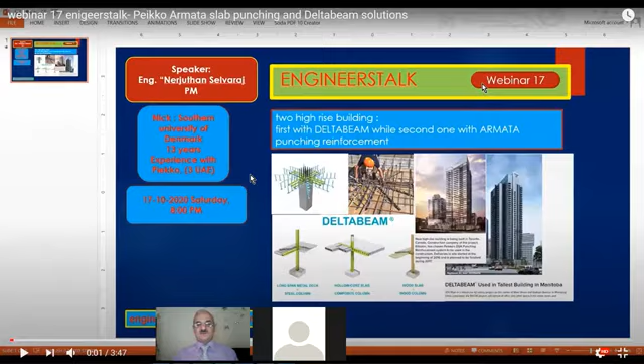Thank you, engineer, for the nice introduction, and welcome from my end for today's webinar on tall building solutions. As mentioned, my name is Nerjuthan, but shortly called Nick as well, so you are most welcome to call me Nick. I have been working at Peikko for almost 13 years, and the last 3 years has been in UAE with various projects from KSA to UAE itself and Oman and India as well.

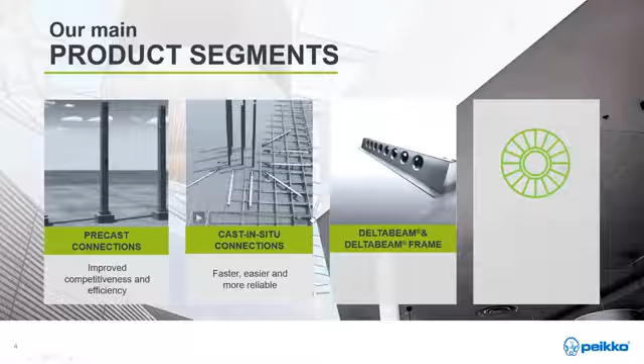Basically, we have four main business categories related to product segments: precast connection, which I will go through today with a few project cases; cast in situ applications, where the product we will go through is Armata, basically a punching reinforcement to prevent punching failure; then Deltabeam frame, which enhances the slim floor structure; and also wind applications for onshore foundations, which we will not go through today.

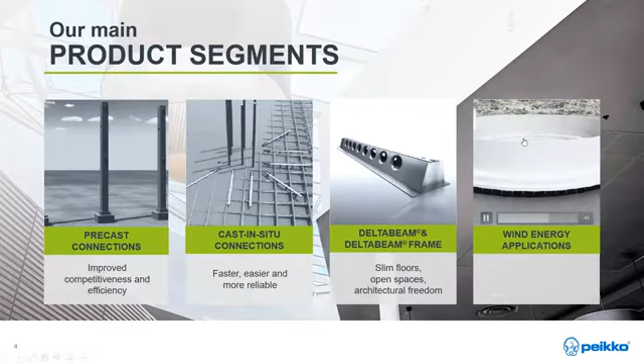But across all four business segments, we are doing our utmost to be the forerunner. This means we are doing a lot of testing, not only in-house, but in cooperation with multiple universities around the globe. Since we are a European company, most of the collaboration is done with universities located on the European continent.

So let's go to the definition of the tall building. You can call it a high-rise building, tall building, or multi-story building, but basically they cover the same name. The Council on Tall Buildings and Urban Habitat mentioned that tall is related to context, proportion, and tall buildings embracing technology as the criteria, which can determine whether a building can be classified as a tall building.

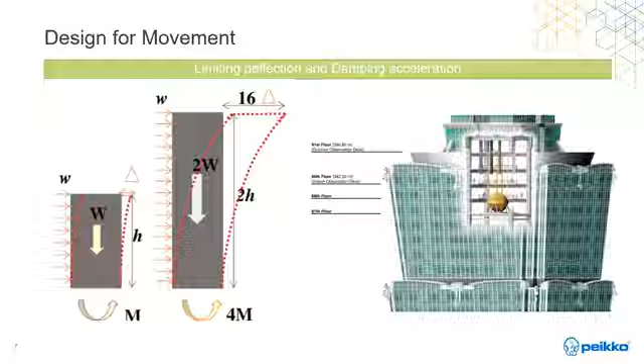If we move to the main design aspects, once the building grows taller, the vertical load increases with the height, and at the same time the horizontal loads increase significantly. This affects the tall building much more. Therefore, a tall building must have adequate bending and shear resistance and shall not lose its vertical load bearing capacity. Worldwide, tall building design practices differ and might be covered by a combination of gravitational, wind and seismic loads, depending on the local building code. The main design objective is to ensure adequate lateral stiffness of the building.

In principle, the structural engineer needs to satisfy two criteria.

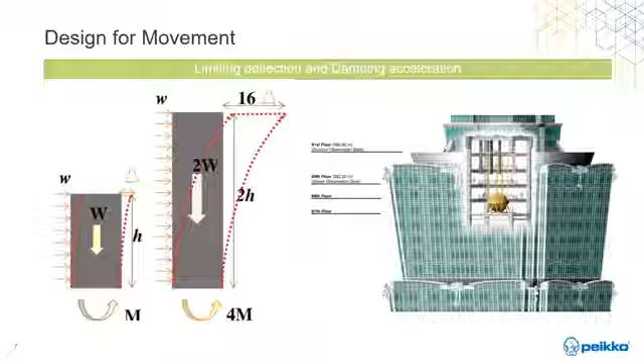They have to satisfy two serviceability criteria. One is lateral deformation, and the second is motion perception. Satisfying the first means limiting the maximum lateral displacement, as you can see in this picture, at the top of the building, and inter-story drifts separately.

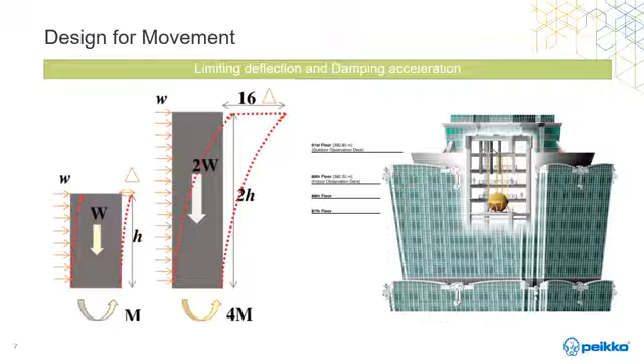The main purpose here is controlling the deflection so the non-structural elements function properly. The practical way to limit the drift is to increase the bending stiffness of the horizontal member, or add a shear wall, or even design stiffer connections.

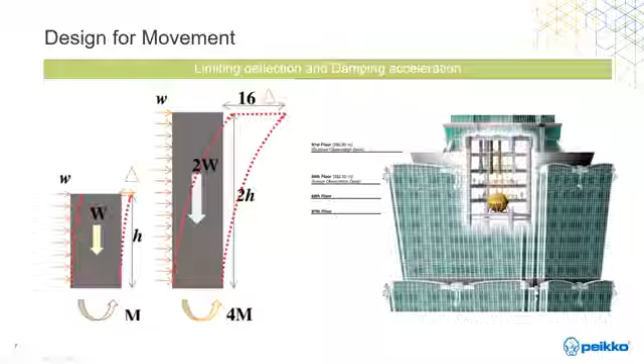The second criteria is to ensure occupants' comfort level, which is dictated by the amount of wind-induced movement. A tall building can be allowed to sway considerably, but the acceleration rate at which movement increases must be damped within acceptable limits. Those limits are based on the sensitivity of our inner ear to motion.

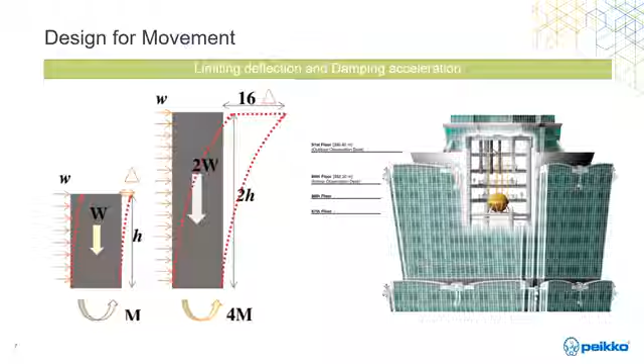Acceleration can be damped in different ways, either by a stiffer structure or sometimes by supplementary mass damping, such as a tuned mass damper. It simply limits the horizontal acceleration with a mechanical shifting large mass in the opposite direction of the applied lateral force.

Here in the slide, on the right side, you can see the largest and heaviest mass tuned damper in the world, in the famous Taipei 101 in Taiwan. It was once the tallest building before Burj Khalifa took over.

If we go to the classification of the typical structural systems used in tall buildings, as discussed before, besides transferring the gravity loads, the important role of the structural system is to resist the lateral forces. Therefore, the hierarchy of the system is mostly categorized with respect to its relative effectiveness in resisting lateral force. So what does that mean?

As you can see in the picture, what engineers have tried to develop is some kind of system based on exterior structures, where basically all your columns carry the lateral forces, or interior structures, where you have cores or shear walls to provide stability against lateral force.

This classification was done by Mr. Mir M. Ali and Kyoung Sun Moon, if I pronounce it correctly, categorizing or classifying systems based on these two criteria.

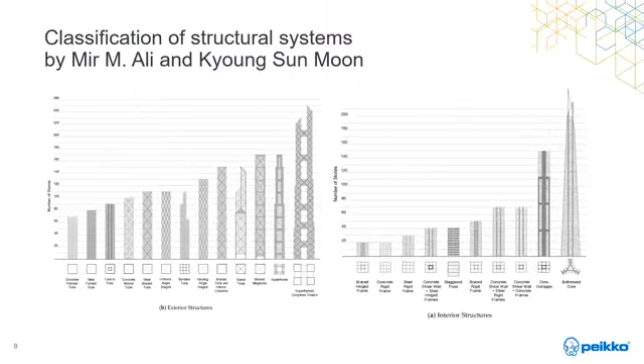To overcome the shortcomings of a single structural system, a natural idea is to integrate the strengths of different systems to obtain the desired behavior of the tall building.

With reference to the classification of structural systems on the previous slide, rigid frames are economical for buildings up to 25 to 30 floors, above which their drift resistance becomes costly to control. However, a rigid frame combined with shear walls results in a much stiffer structure, and you can actually go up to 60 to 70 floors.

To reach super tall buildings or towers, the mentioned system is not sufficient. You need a much more complex system to obtain stability. A super tall building is classified when you have a height of 300 plus, and for those tall buildings, you need mega tubes or super frames with outrigger systems.

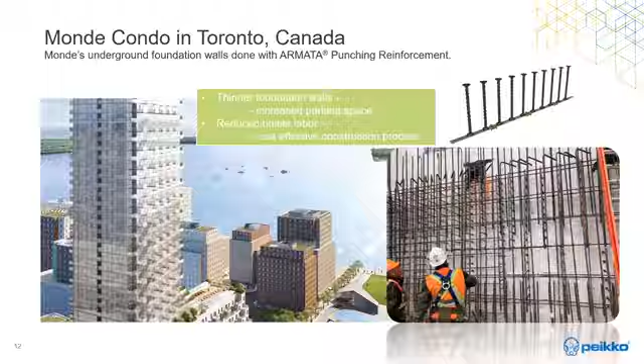Let's go to the top of the building. Here I will explain to you about the floor-to-floor height solution, basically slim floor.

We have multiple applications to achieve this target. But some of the added value of having the slim floor is that, first of all, you can add extra floors, or you can reduce the overall height. And for the developer, the end user, or the client, it simply means better return on investment. This was a key factor for some of the projects I will showcase.

It's not a secret that developers want to maximize the number of floors in order to get more rentable space within a certain height allowance. The slim floor structure helps very well here. By reducing the floor plate thickness, floor-to-floor height becomes lower, which in turn yields more floors for a given building height.

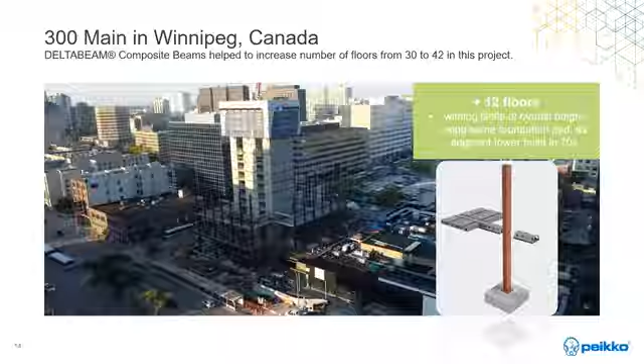Delta beam instead saved the overall height of the building for additional floors, and maximized the total square footage. Talking about the savings in the same project, I will go to the foundation size, because there are a few examples of how this has been achieved.

The powerful argument in favor of slim floors is that you are reducing the weight of the overall structure, which in turn makes the foundation less expensive.

In this case, the 300 Main new tower is designed with the same foundation pad as a similar building called 360 Main, which is close by, built in 1979. Since the combination of delta beam, hollow core, and steel column is much lighter than the previous 360 Main cast-in-situ concrete structure, the developer was able to increase the number of floors from 30 to 42, using the same foundation pad as the cast-in-situ structure.

So this is another strong argument for why slim floor structures are generally very recommendable. An added advantage of delta beam, a composite beam, is the 2-hour fire rating without any additional fireproofing, which is also proven to be substantial savings compared to conventional wide flange steel.

The next project is also located in Winnipeg, Canada. Like the previous project, it also uses delta beam composite beams, and it played a very important role in meeting the needs of the architect and the structural designer.

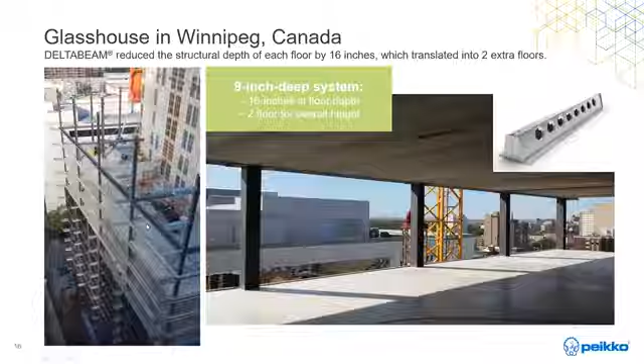By using the delta beam system, they reduced the floor height by 16 inches, and this translates into 2 extra floors compared to the conventional structural system technology.

Besides adding extra floors, since everything is prefab, it also allows for rapid speed of erection, since everything is prefabricated. Delta beam composite beams were then connected with the column using the Peikko modular PC corbel.

I think you can barely see it here. It's actually a hidden corbel system, which is welded from the factory onto the steel columns. So it gives you this kind of quick, easy installation.

And flat ceilings, as you saw in the previous slide, also mean straightforward HVAC installation that further reduces building time. An additional bonus to the Glasshouse building site was that the delta beam composite beam did not require any intumescent coating.

Intumescent coating is a standard industry procedure if you have exposed steel, but this has to be done on site, and it takes time. You need a primer, a base coat, and a top coat. None of this was needed with delta beam, as the beam is cast in concrete.

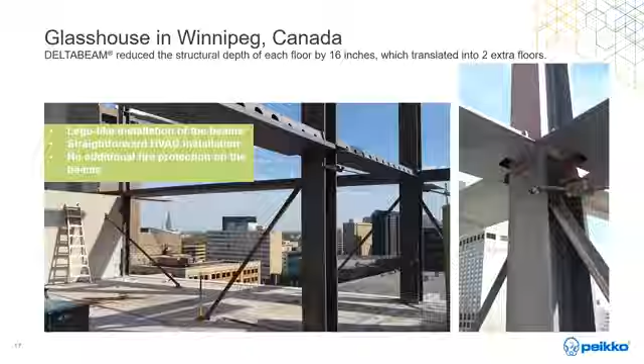To prove this point, delta beam has actually been UL tested and has achieved 2 hour, 3 hour, and 4 hour ratings without any additional fire protection on the exposed steel part of the delta beam.

The next project in the slim floor is not with the delta beam, it's with our PSP and Kubo. Now we've moved to the European continent, and we will not have Armata as mentioned earlier. We'll speak about PSP, basically the same product, but due to local requirements, we are calling it PSP.

Reinforced concrete slabs have been used in this project, supported by high-strength precast concrete columns and shear wall cores. Generally, in situ flat slabs are characterized by the absence of beams. Whatever loads are added onto the slab are transferred directly to the column, so the columns need to punch upward through the slab.

So to avoid drop panels over the column position in the slab and to accommodate the high shear stresses, Peikko PSP punching reinforcement in combination with Kubo column caps was applied for this project, and you will see that in the next slide as well. Kubo is basically additional reinforcement to take high shear force along with our PSP.

This is the Kubo, the steel part, which is placed on top of the column. The thickness of the slab was kept at a very relatively low level with the help of our product. Part of the concrete and column were produced in a precast element factory and delivered with our Kubo, as you can see on the right side of the picture.

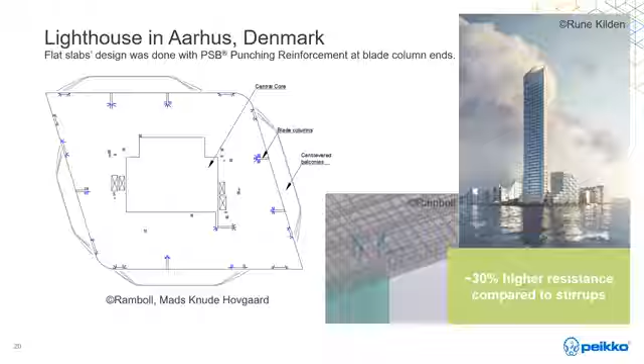The next project is a post-tension flat slab, used in every floor of the Lighthouse Tower project in Aarhus, Denmark. Post-tensioning in this project actually helped to achieve a 200 millimeter slab thickness, with up to 8.2 meters span without any column.

The slabs are supported by a central core and blade columns on the perimeter of the building, as you can see in the typical layout. In addition to the outrigger action, where the slab is rotationally fixed to the column and the core, this was employed to increase the stiffness of the building against wind loads and vibration.

These requirements made the column-slab connection design very critical, and the high load on the connection required the use of punching reinforcement for all floors. Again, Peikko was chosen as a supplier and design partner, simply due to the Peikko PSP punching reinforcement having a higher upper limit for punching capacity.

This is what I tried to show in the slide here. We are able to achieve 30% higher resistance compared to traditional shear links, simply due to the headed stud formation of our product, which gives a much higher anchoring effect in the concrete.

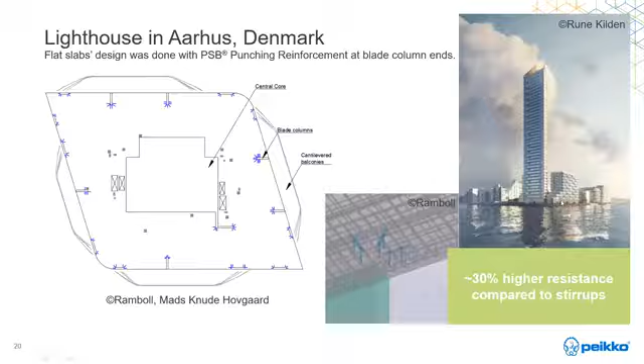The project is ongoing and planned to be completed in 2022, and it will be one of the highest buildings in Denmark.

The last project I will take you through is the Alsik Hotel, also located in Denmark, in the southern part, in a city called Sønderborg. It's designed by the world-renowned architect Henning Larsen, who also designed the Ministry of Foreign Affairs in Riyadh. This is the picture you can see, just a bonus information for you guys.

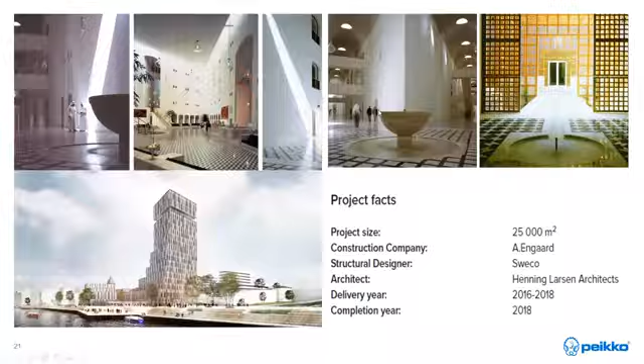The structural concept is very much in line with what we spoke about already. You have a central core in the middle, which is cast in situ, and then in the perimeter, precast columns with the delta beam in green, and internal beams, as you can see here, the small beams in the corridor area.

So the MEP can be done without any drop beams, supported by precast walls, shear walls here. This is how the structural system has been done. In the next slide, you will see the detail.

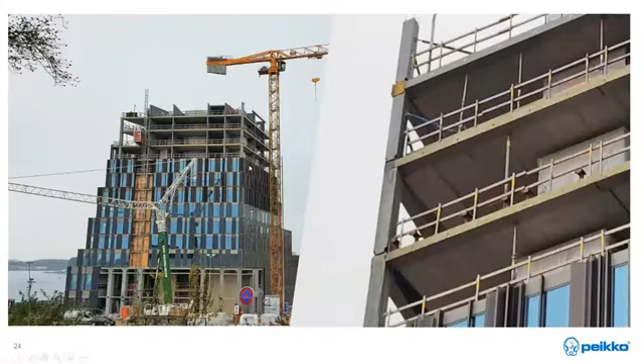The delta beam runs through the columns, and we've also utilized the Peikko column shoe in this connection, which I will come to later in my presentation. One of the main challenges was to control the deflection in the delta beam.

They had glass facades, directly fixed to the delta beam. Due to the sensitivity of deflection on the facade, the supplier had a very high demand on the deflection criteria. So all the beams on the periphery here are designed for L/2000 for the incremental deflection, applied by the movable dead load and live load.

So we can design the beam for a very tough deflection requirement as well, and still achieve a relatively slim floor structure.

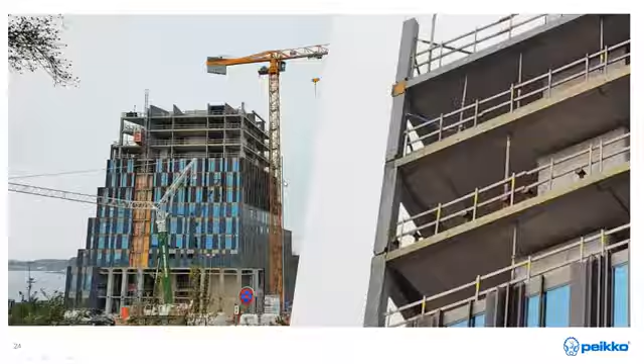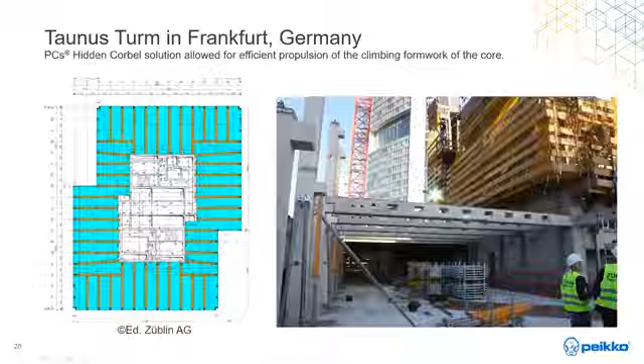In the next slide, you will see the cast in situ reinforced concrete shear wall, and the cores are widely spread in the tall building, as mentioned. This is simply due to the in situ concrete technology being favored by many engineers, because of the structural continuity it provides of the element.

But on the other hand, what we are seeing is a clear increase in use of precast concrete technology in tall buildings. What makes precast a worthy choice is that the main advantage is the high speed of construction, reduced shoring requirement, and easy quality assurance process to be implemented at the site.

The major challenge in this project was limited space available on the building site. The storage capacity in the upper floors of the tall building was very limited. So prefab cast concrete columns, beams, and slabs were selected for the project simply to eliminate the need of space-consuming formwork.

To simplify the construction, you can see in the picture our PCs corbel has been embedded into the shear wall before the reinforcement cage has been applied.

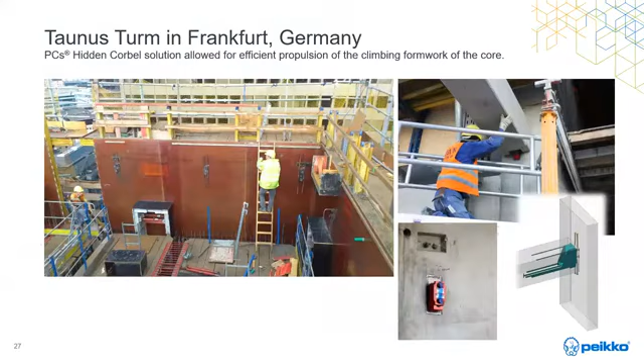At that level, the building forms a spiral by shifting the stories along its vertical axis. Above the 22nd floor, the tower returns to optimize floor areas and complete its rotation, realigning with the structure underlying beneath these alternating cantilevers.

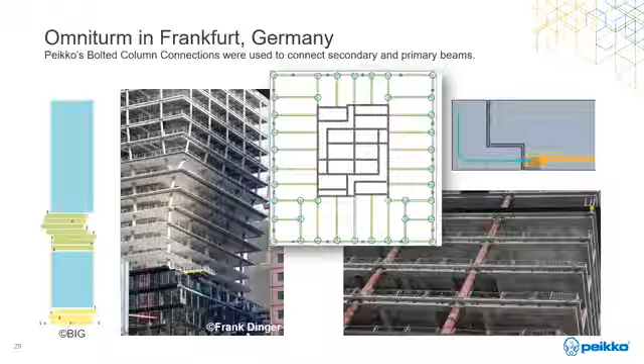Moving to design flexibility: in this section I'll showcase one project where Peikko typically engages as a design partner not from the concept stage, but coming in to provide the stiffness value to ensure global stability is secure. We are not doing the design for the full structure — that is the responsibility of the main lead consultant. But there have been cases where Peikko has taken the full scope of design, and in the next slides I'll go through one of those projects.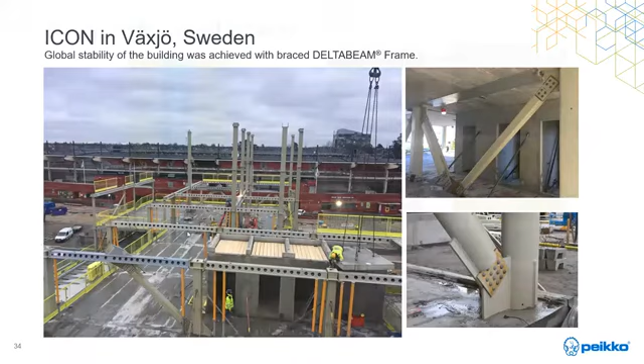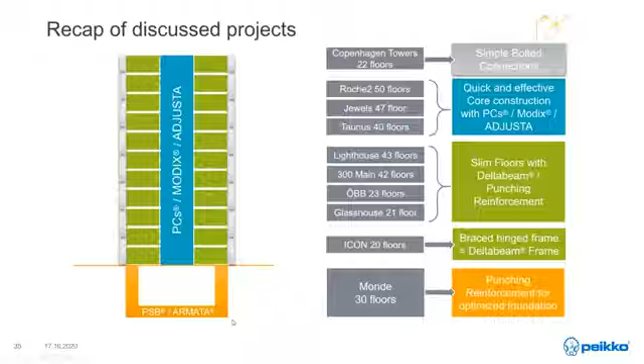I'm coming to the end of the presentation, so just a quick recap. I won't go through everything one by one, just to show that we're able to provide solutions from the base throughout every single floor up to the top of the building. The base we offer is what we call Armata or PSB, which can be used on foundation, wall, or slab. Then we have different applications to reach your target, whether you're looking for a slim floor structure with the delta beam or with our punching reinforcement.

And if you want to combine precast elements with cast-in-situ structure, as showcased in this very complex building, we have connection details to accommodate that as well.

Before we go to the question and answer time, I would like to showcase three different videos showing the projects in real action.

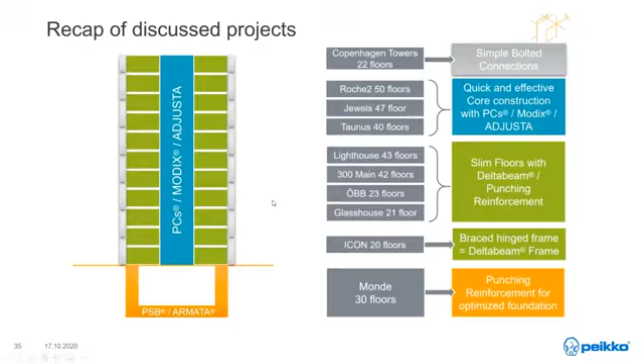The first project is also located in Copenhagen. It's a G+30, if I remember correctly, with a core in the middle, and the rest of the elements are precast. Here you will see the bolted connection in action.

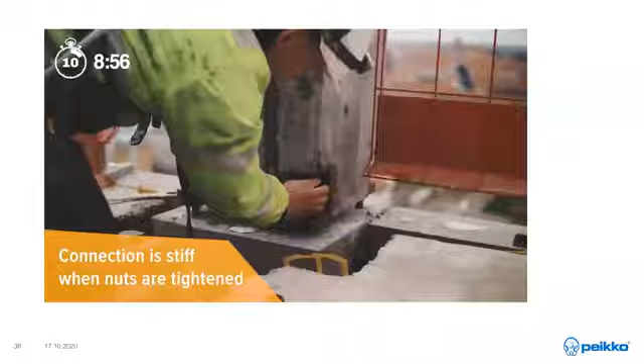Let's go to the next one. It's not a high rise, but it showcases the delta beam frame system and its ability to enhance construction time, and how it's done in a practical way. Since it's not a high rise building, we were able to do it with the pit connection system, which you will see in the video as well. This one consists of composite columns and delta beam composite beams along with hollow core precast slabs.

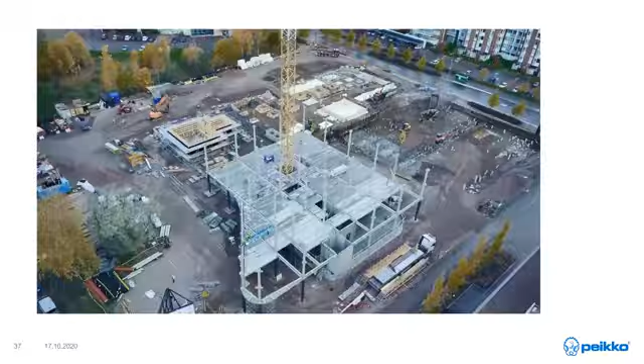Are you looking for a building frame that saves both time and effort? This is it, the Delta Beam frame. A complete one-supplier solution consisting of Delta Beam composite beams, composite columns, and other additional steel structures of the frame. Being a slim floor structure, it allows for a maximized room height and up to a 12 by 16 meter grid.

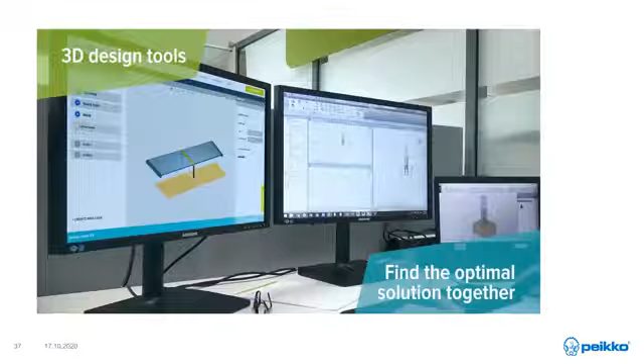Additionally, Delta Beam frame enables architecturally demanding facades and shapes and flexible open spaces. Our expertise in modern 3D design tools helps us find the optimal solution together with your architects and structural designers. The CE Mark frame components are manufactured in our state-of-the-art factories. Components are easy to transport, store, and install.

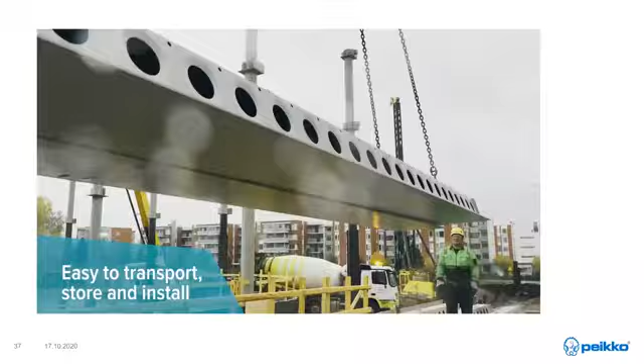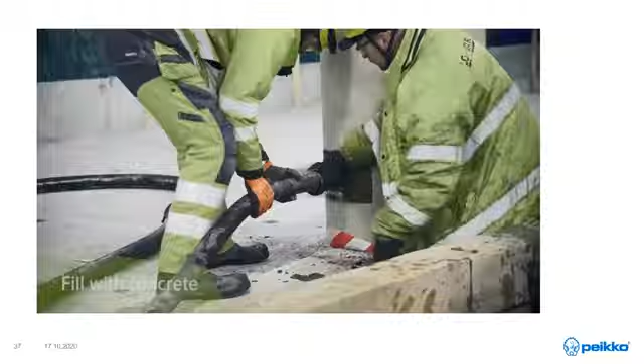First, erect composite columns with our bolted connections. Next, hoist and install the delta beams. Now you're ready to install the slabs, whatever your chosen system is. Fill the composite columns with concrete and cast the delta beams while you concrete the slabs.

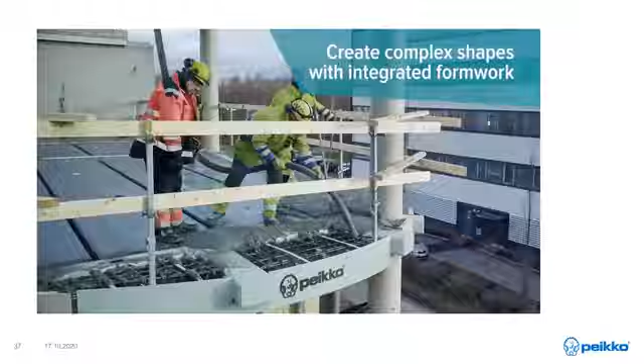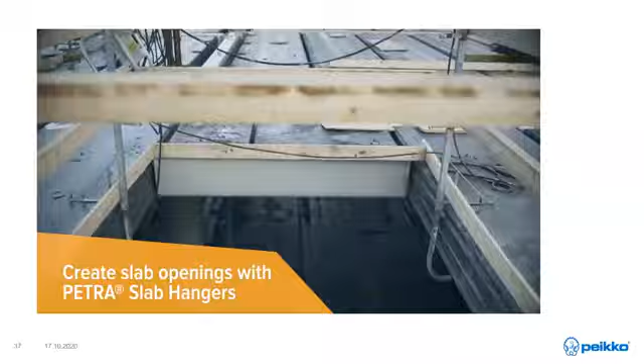Note that you don't need any extra fireproofing. Delta Beam frame has structural fireproofing built in. Additionally, you can create complex facade and interior shapes with formwork integrated in the delta beams. Easily install safety rails. Use Petra slab hangers to create openings in the slabs. Install the wall elements fast and easy with Sumo wall shoes.

A single frame supplier for saving time and effort, the Delta Beam frame is easy to erect piece by piece. For you, it means an easy-to-manage project. For more information, take a look at peikko.com/deltabeamframe and choose the faster, safer, and more efficient way to build frames.

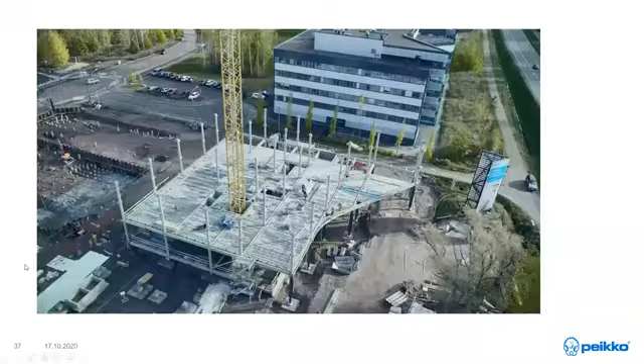The last video is not a real project presentation, it's actually an animation of our Armata. We have done multiple projects in KSA with this Armata for large projects where there has been substantial savings for the contractors, and of course achieving your slim floor so your MEP can run through without any bendings. Let's have a look at this Armata and then we will go to the question scenario.

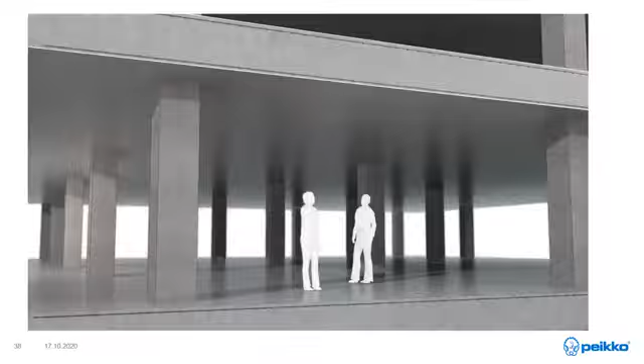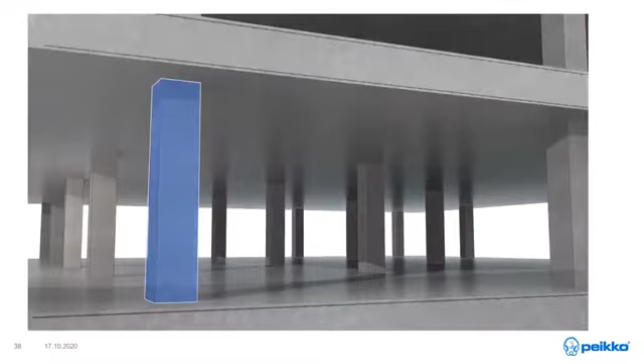Just to give you some information while the video is running: the idea is to avoid the broad methodology you are using to accommodate punching shear. As mentioned earlier, this double-headed stud, or Armata, is named for the anchoring head on the product, which simply gives you a higher anchoring capacity. This allows you to reduce the slab thickness, or you simply remove the drop panel.

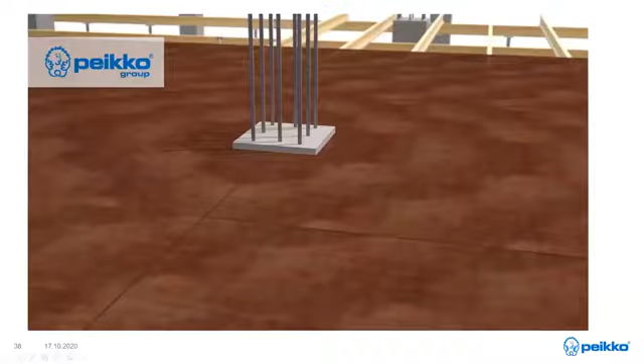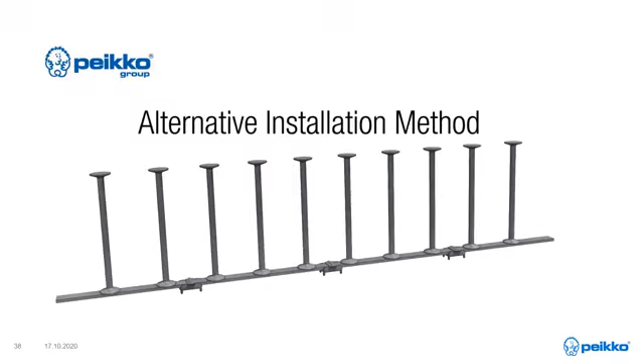So the installation here can be done in two ways. One is that we create the mesh showing the dimensions, the bottom and top mesh, and based on our design—either we design it for you, or there is a pre-design tool on our webpage—it will calculate the length and spacing, and so on, and you just place it on top. The second method is to install the stud first, and then you create your mesh around it, which gives you the required concrete cover for the stud.

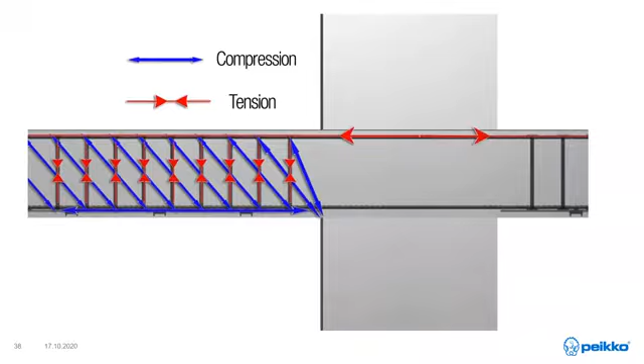The upper limit here is, of course, the maximum resistance of the slab itself, so we can't exceed that.

And the next thing I'd like to highlight: if you want to find more projects where our applications have been applied, you can go to Peikko.ae reference, and there you can find all types of projects Peikko has been involved with, from delta beam to Armata to bolted connections. You can filter based on location and country, or according to building type and product as well. So let's move to Q&A.

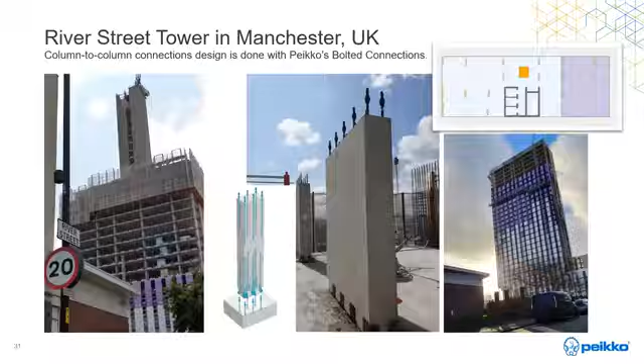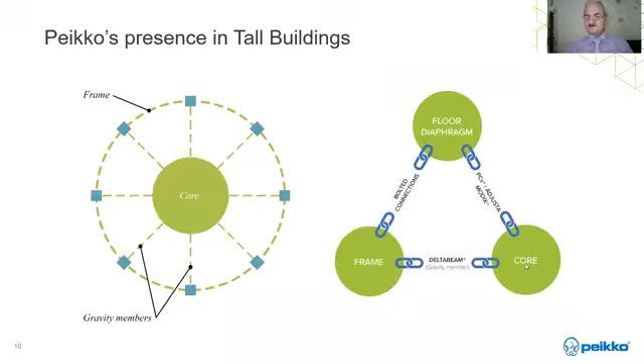As mentioned in my initial presentation, let me share my screen with you. As you can see here, the delta beam, if we are using it in this kind of concept where you have the core and then the perimeter to take the lateral forces, the delta beam in this case will only act as a gravity member. So the connection between columns and beams will primarily be a pin connection. But the delta beam, along with your floor diaphragm, will be able to transfer the axial forces into your core, which are induced by wind or seismic.

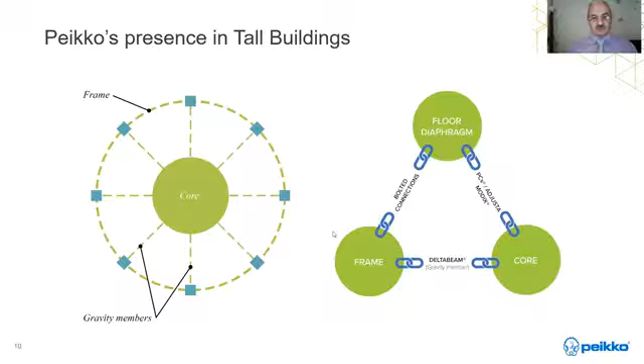The question is the same point for the earthquake effect on this connection - are we doing some preparation for this connection to dissipate the earthquake effects? So what are we doing here? What is Peikko doing here? Basically, because as you know, we are going into high-rise buildings, 40 floors and 30 floors, and there is an effect from earthquake or wind.

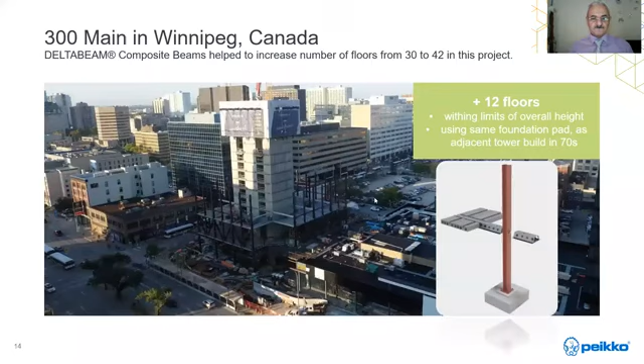As you can see in this building, which I was going through with you, these are simply pin connections. I will try to show this picture, a similar one here. So you have a steel column with a hidden beam, and here it is simply a pin connection. What we are doing in Peikko at the moment is testing the beam for ductility behavior. The connection itself, we are studying a lot. If the beam is part of the moment resisting system, then the connection becomes a very vital part of it, and these studies are ongoing.

What we are doing when we have cast in situ columns - in most cases we can design the beam as a continuous system. Basically, the beam will run over the column. In those cases, all the rebar which is coming through the column below will penetrate my beams. It means simply that I will make an opening in the bottom plate and the top plate, so the rebar can go through.

To address the shear flow between the beam and the column, what we have proposed in some projects is to have a shear stud - this is difficult to show here, but what we have done in the steel plate is weld the shear stud, which is embedded into the concrete column, and you also have shear stud coming into the beam section itself. So it allows you to transfer the shear flow between the elements. We will not utilize your rebar to take the shear flow, but those will be taken by the headed stud, which is applied separately.

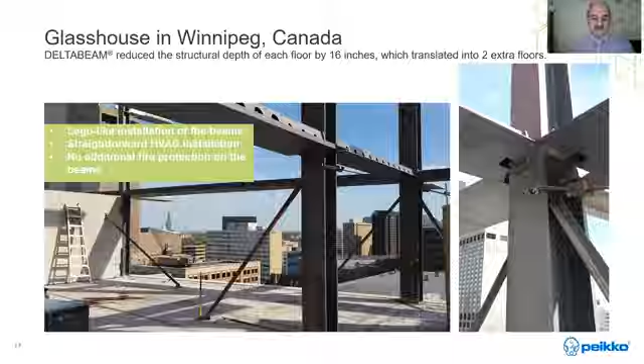Okay, so basically this head stud is not a new innovation, it already exists in the market. The conventional method is the shear links, which I already mentioned, and everybody is aware of that - how you design it, how it works, and all the complexity you have at the site.

So this is the first advantage - it's rebar, so you have a yield strength of 500. The second thing is we are able to manufacture in UAE, and as far as I know, Peikko is the only manufacturer who has the production capacity or capability to do it in the GCC region.